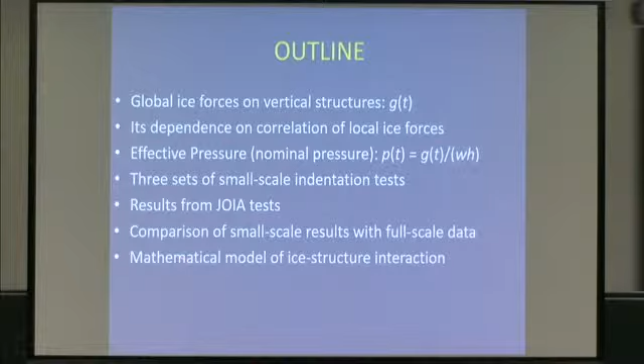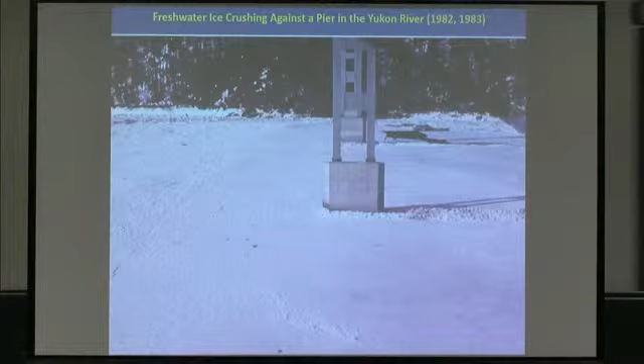My first exposure to ice structure interaction was looking at the ice moving at the Yukon River. This is the bridge pier. There are 6 of them to support the Alyeska pipeline, and on top of the bridge there is this road. Main purpose of this bridge is to support the Alyeska pipeline.

And I was told by the architect, by the engineers who designed these bridge piers, that they designed it for a pressure of 400 psi. That was the thing going in the 1980s.

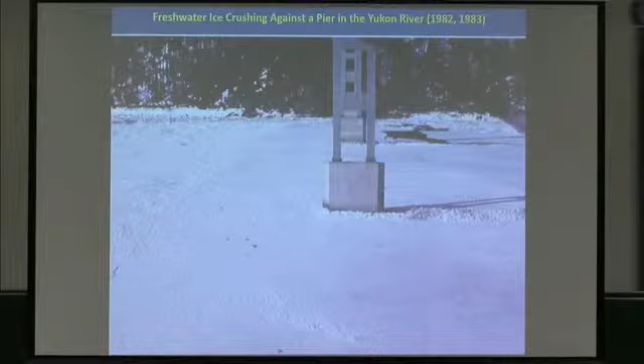Some more views. The ice here is freshwater ice, 1 meter in thickness, and these bridge piers are 30 feet long and 9 feet wide. That means 3 meters in width and about 10 meters this way.

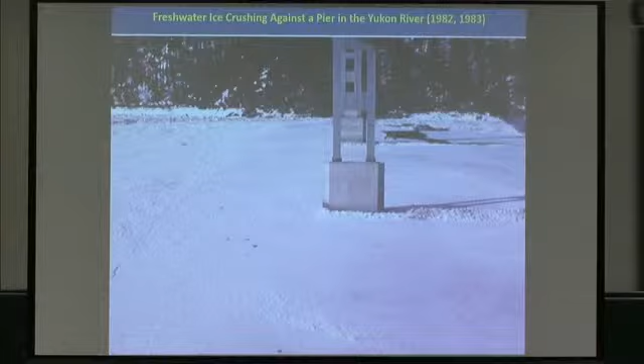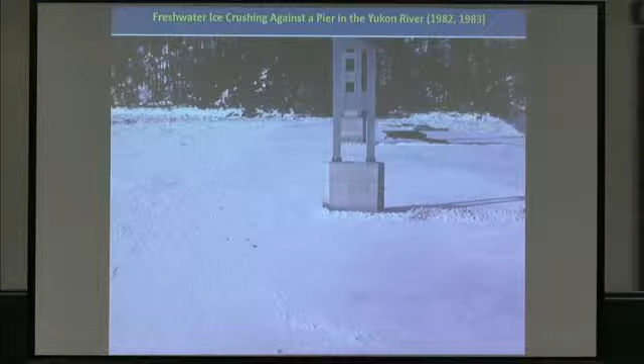The ice moves at a speed of 2 meters per second. I just happened to clock that, how much time it takes for the ice to travel from here to here, and then I estimated that the speed is about 2 meters per second.

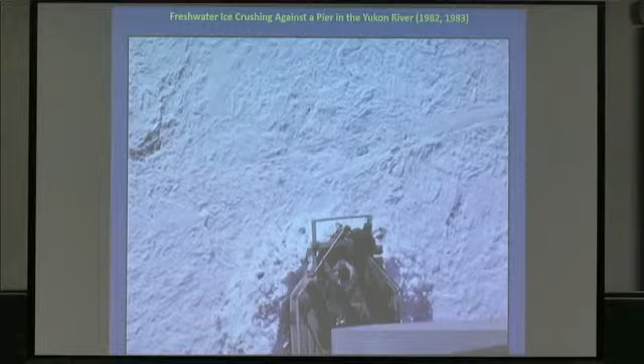So different views looking from the top. The previous picture that I took was from the high spot looking at other bridge piers, and then looking down, then looking sideways, and then looking back.

What interested me most was how an intact ice sheet could just turn into rubble and be on both sides of the structure, and then also underwater.

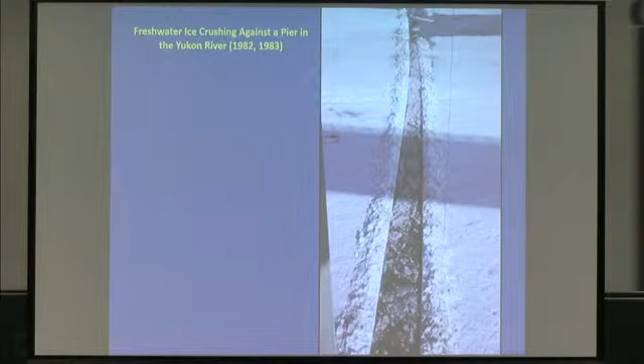I shall talk about Molikpaq data. That Molikpaq at the Amauligak location was deployed in 15 meters of water depth, and all the interaction I'm going to talk about is when there was very severe vibration in 1986.

As the ice moves against the Molikpaq, it crushes, and sometimes the weight of the crushed ice breaks the ice, and then this unbroken ice comes in contact again, and the process repeats itself.

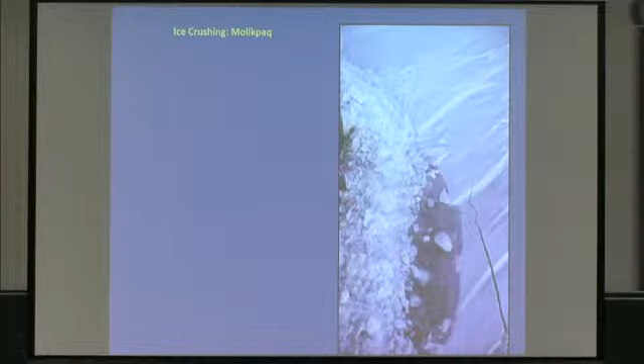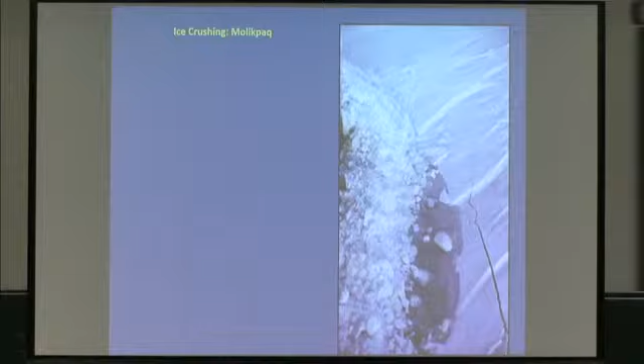I've read some reports where they talk about the ice doing stop and go, because when you observe from the top of the structure looking down, it appears that the ice is basically stop and go - that's the intermittent ice crushing. Sometimes it doesn't do that, because when it moves at a fast rate, it's just smooth or continuous crushing.

This figure was presented by Jefferies and Wright in 1988. The ice load magnitude is not displayed here, but these data were readings from strain gauges installed on three support structures, quite far apart - A, B, C - and they're random. There is no correlation between the ice forces as measured by these three records.

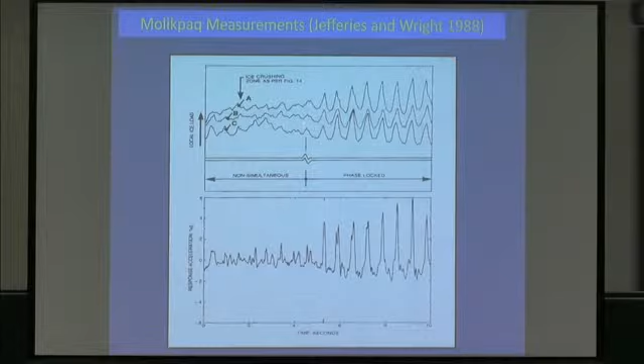Then as this ice floe slowed down, it went into the other mode, which is phase lock, they call it, or in my terminology, uncorrelated local ice forces versus correlated ice forces. This can be repeated in small scale experiments, except when I did the experiments, I began from the low end of speed, went to the high end, and observed these phenomena, then again at higher speed.

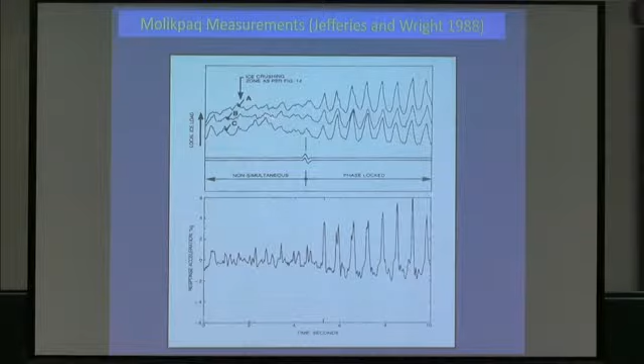Okay. I woke up in the morning today just to relieve myself, but I couldn't go back to sleep, so I started reading on my Kindle. And what I read is all depicted here.

This is Plato's Revenge - these are notes from that book, Politics in the Age of Ecology. What's the forte of the human brain? It's metaphors. What is a metaphor? It's a verbal trope or a mathematical formula. Scientific metaphors are self-consciously formal models or theories.

Model means likeness, so I'm sort of going towards physical modeling of this thing. But theory is also nothing but a story in which the data are woven together to tell a plausible story about reality. A story, if it is a very good theory, will allow very accurate prediction. So the task of science is to find the metaphors that best stand for physical reality. And eventually, as Einstein said, it is theory which decides what we can observe.

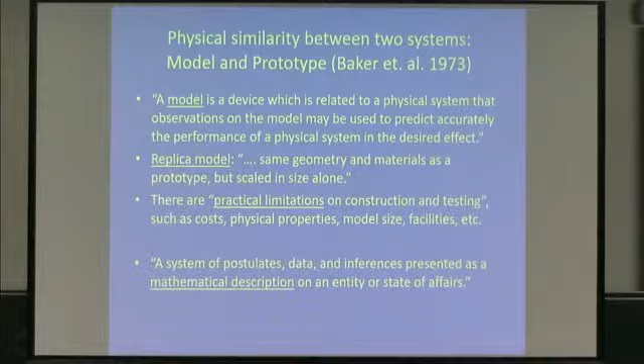And a system of postulates, data, or inferences presented as a mathematical description of an entity or a state of affairs - that's mathematical modeling.

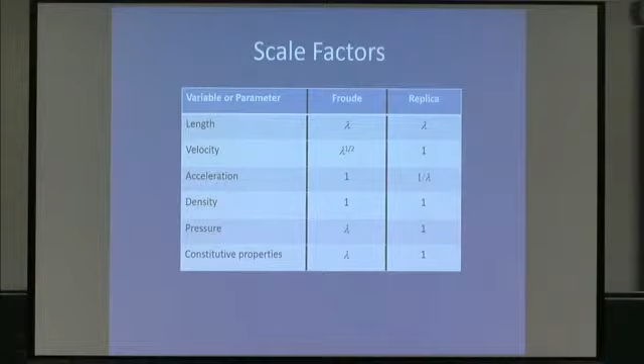In ice mechanics there are two types. Practically everyone follows Froude scaling because the gravitational forces are important. So for the length scale, you make a smaller size model of the prototype, using the same density - water and ice - and same acceleration, since unless you do it in a centrifuge, we are doing experiments in the same gravitational field as Earth. Then velocity relates by this scale factor, and the pressure and constitutive properties have to be scaled down to conduct the test so that all forces are in equal proportion.

However, in replica modeling, you scale down and use the same material as the prototype, but since gravity is no longer important, we don't use those scaling factors - instead you use the same material. So when you use all the same material, the scale factor is simply 1, and the velocity turns out to be 1 also.

That's the benefit of replica modeling - the pressure you measure in scale experiments or model tests can be directly related to the full scale situation, and you don't have to reduce the constitutive property of the model material. Since I did all my experiments with freshwater ice, I basically use this replica modeling.

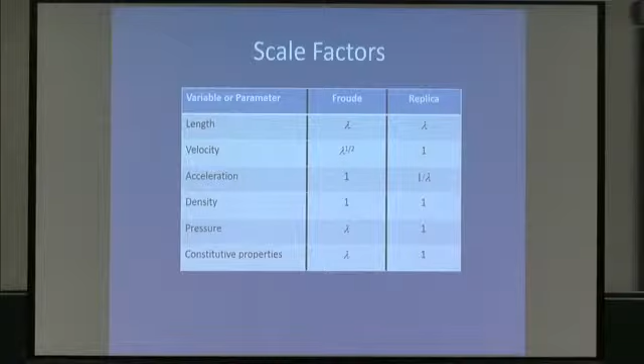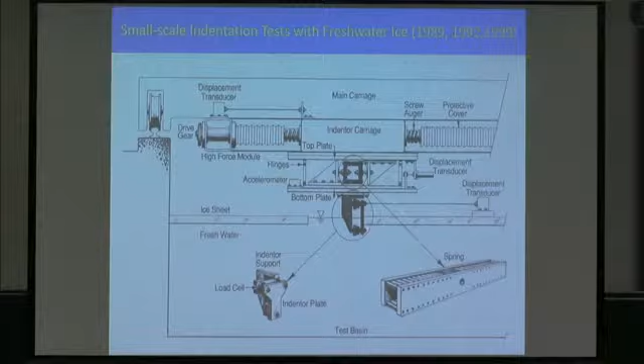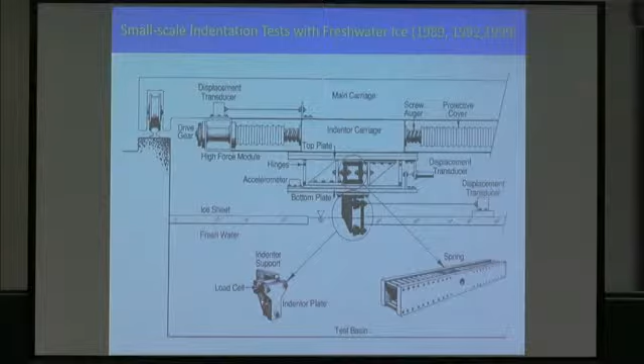So in my first series of tests, this picture shows the experimental setup. I have two plates attached to each other by hinges and bars, and they can rotate with respect to each other. Through these brackets I attach the spring, and underneath the lower plate I attach this indenter plate. So I'm measuring the forces as they develop right at the ice-structure interface, and I can change the stiffness of the whole structure by removing some of those bars in the middle.

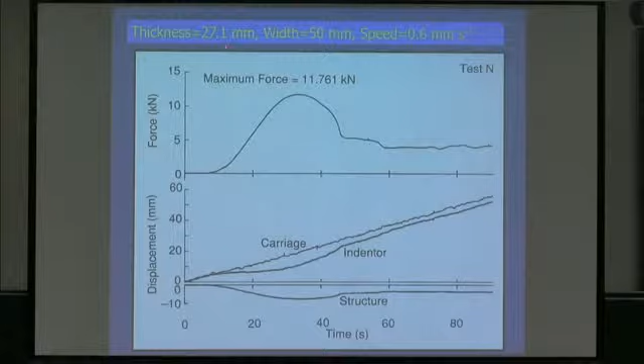At very low speed, 0.6 millimeter per second, the forces rise up, come down, and then stay constant. There is a zone of microcracked ice in front of the indenter during this period, and this is when the microcrack zone develops, and eventually it just follows the thing. The carriage is going at a constant speed, but the indenter lags behind because of the force development, and the structure displacement is given here. So it's all ductile deformation.

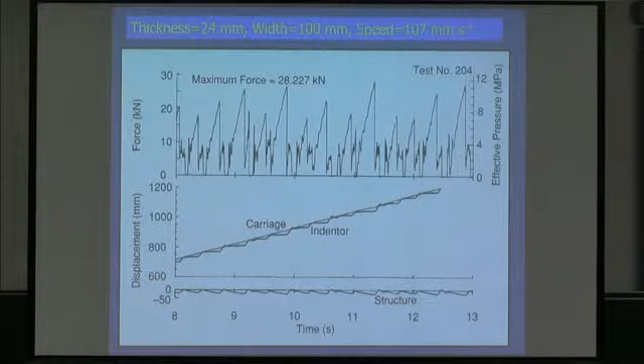But at an increased speed of 107 millimeter per second, there is this intermittent crushing, and I use that term because it happened intermittently, not continuously. Later on, at even higher speed, I experienced continuous crushing. But it should really be called ductile brittle crushing, because during this time...

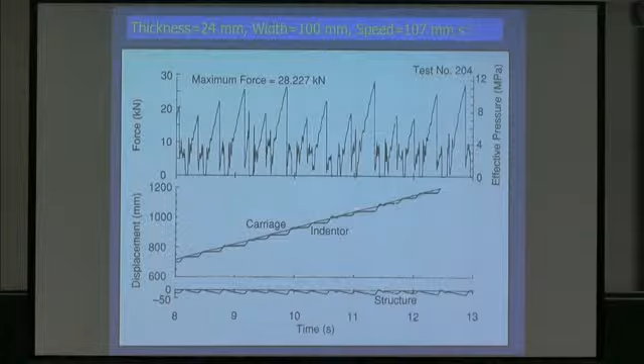This is the plot of the carriage, and whenever the force develops, the indenter lags behind a little bit, and the slope of this line is different from the slope of the carriage. That means the rate of indentation is slower than the rate at which the carriage is moving because of the structural compliance.

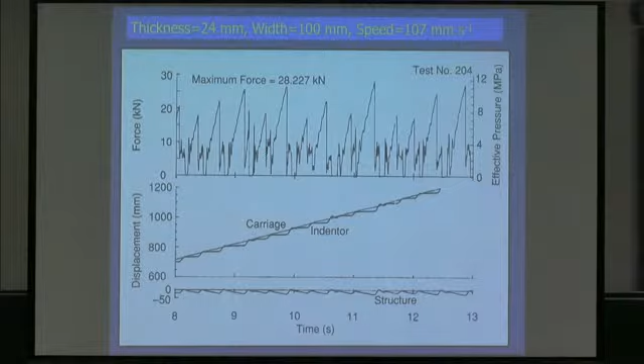Let's look at it in detail, starting from here. The force carriage and the indenter are together, but as they touch each other, the indenter lags behind and the force develops, structure displaces, and then suddenly there is a finite amount of force that the ice can sustain. So fracture occurs, and we have this sudden decrease in the force level, and after that the structure moves forward at a very high speed, and we have this interaction, which I call intermittent crushing. For a time, once the structure reaches this portion, it backs up because of the vibration, there is zero contact, and finally the next cycle begins.

Now this is the slide where I show one time that I got structural vibration at its natural frequency. Carriage moves over here, indenter displacement is indicated by this curve. You can notice that whenever the indenter slows down, there is a rise in the force, and this is totally in concert at all times.

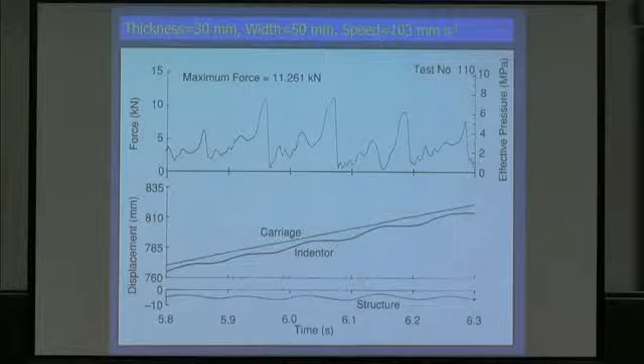I relate this incident to the swinging of a child being pushed by the parent. As soon as the child is about to go back, you get a push. So this is the push that you get every time, and if you can admit, this morning I talked with Andre, about whether the pushing of the child is a forced vibration. He agreed, but when I said that then he should agree also that this kind of situation is also a forced vibration situation. Anyway, we can talk more about that later.

In one experiment, I was incrementing the speed of interaction of the carriage, and one time, suddenly the interaction changed from this intermittent to continuous crushing.

Why this should happen was asked by Professor Morel in 1989 when I made this first presentation, that these low force values are otherwise very puzzling. He gave some explanation that there may be some melting taking place and things like that, but if you can go back, so from this force level you get this force level.

I have given the forces as measured in kilonewton, but in effective pressure terms, this is like 2 megapascal, and here it is more than about 10 megapascal. So there's a tremendous difference. Why this happens at that time I could not explain, but now I hope to explain all these things to you.

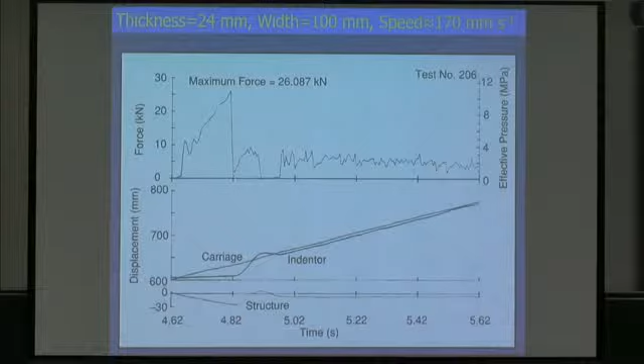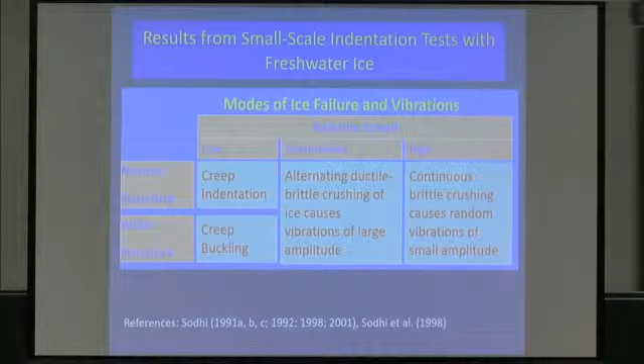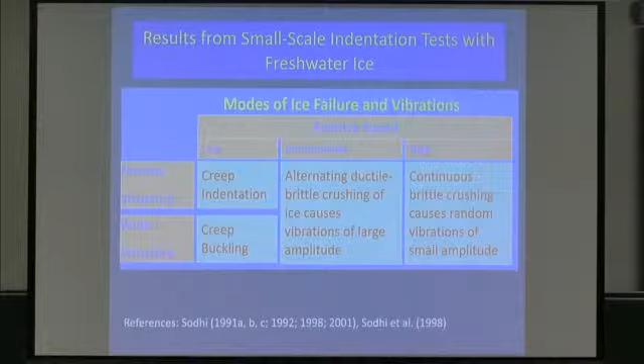At the end of the test series, I made a failure map: if the relative speed between the ice and the structure is low, there will be creep indentation for narrow structures and creep buckling for wide structures, because creep buckling is also a competing mechanism. At very high speed, you'll have continuous brittle crushing taking place with very small amplitude of vibration. However, in the middle, there is alternating ductile brittle crushing of ice, causing vibrations of large amplitude, and this sometimes gets the compliant structure into trouble because of this type of ice failure.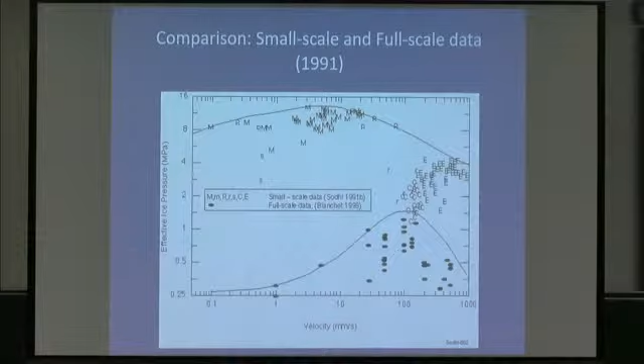So what I did, I plotted all the data that I had from my tests with respect to the indentation speed - that means the actual indentation rate the indenter is indenting into the ice versus effective pressure. I published this figure, and Blanchet in 1998 put his own data points from the measurements he had made, and I was somewhat happy to see that this C, meaning continuous crushing, is close to the full scale data. I never expected that to happen, but I was really encouraged to work more on this topic.

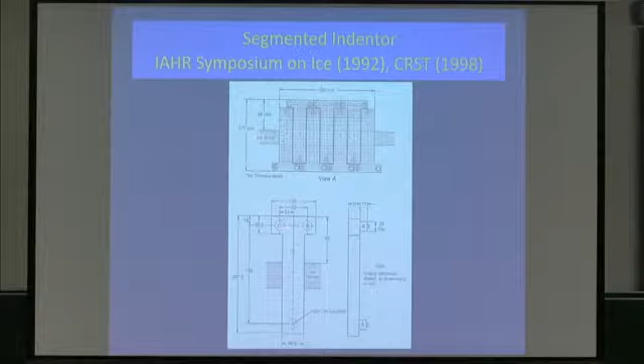Then my second set of experiments is with a segmented indenter, and I have 5 of them here. It's the same setup as before, except that each segment is in the form of a T, and it is supported - each segment is supported by 3 load cells.

So when it interacts with the ice, the local ice forces are measured, say in this segment, completely independent of the one of all the other segments.

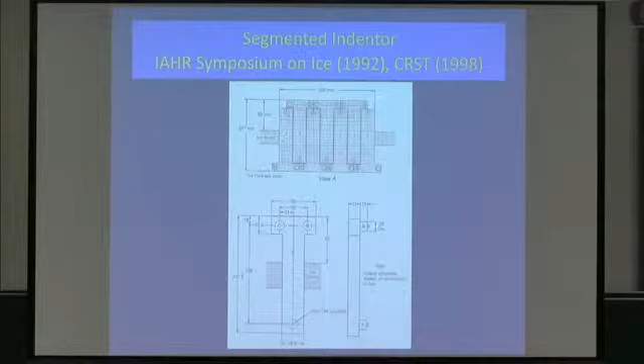Before I go on to discussing the results of this particular set of experiments, let me talk about correlation functions. There are two correlation functions published in the ice mechanics literature. One is by Kry in 1978 and Ashby et al in 1986, and by Dunwoody in 1991.

Both these functions give you eventually the same main conclusion. The delta or L discussed here is a correlation length parameter, meaning within this length everything is correlated, and outside this there is no correlation. But you can also express that as a negative exponential decay on this side and this side, where there will be some correlation here. Anyway, this is an alternate way of doing that.

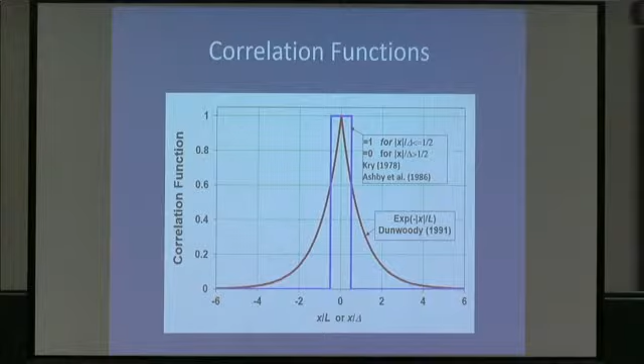I will discuss the one over here right now. Let's say this is the width of the structure, W, which is divided into n segments. N can be arbitrary. This has something to do with the asperities created as a result of ice structure interaction, and it is believed to be somewhat related to speed of interaction.

So the global force is equal to the sum of all the local forces, meaning all the forces measured in each segment, F sub I goes from 1 to n. So effective pressure P sub T is divided by the nominal area, and you can write this down in terms of n delta, which is simply width. So this is the effective pressure in each segment.

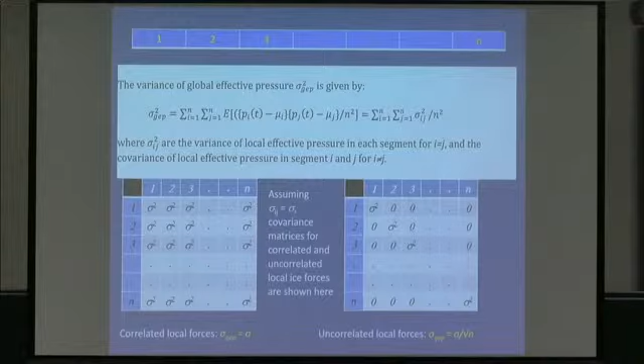However, if you put n equal to 1, meaning there is a correlation across the whole width of the structure, then you get this result. So if you have fewer stocks in your mutual fund, there will be high variability. It's as simple as that. So let's look at what the data is telling us.

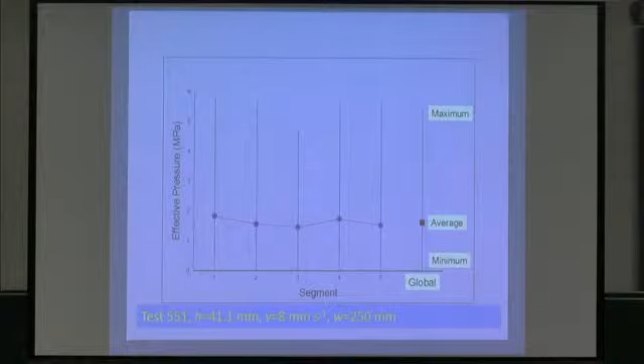So now this is the data. I'm plotting here the minimum, maximum, and average in each segment and the global load. Notice that even though there is a perfect correlation of data, the global average is the same as the local average.

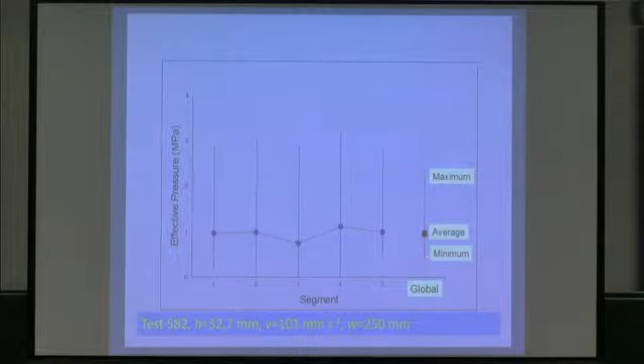At the intermediate speed, the variations are still very large compared to the global variation, but the average is the same. And then at very high speed, the average is the same, but these variations are much bigger than the one for the global force.

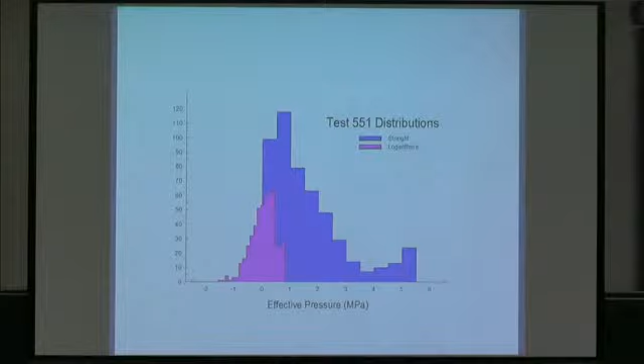This is the distribution for the low speed data. There are two sets here. The pink one is logarithm of the pressure, but just look at the blue shaded area, and this is the distribution as recorded from the test.

This is the distribution, with a little tail over here, but more or less not much different from the previous slide. And then in the high speed data, it's almost normally distributed around the mean.

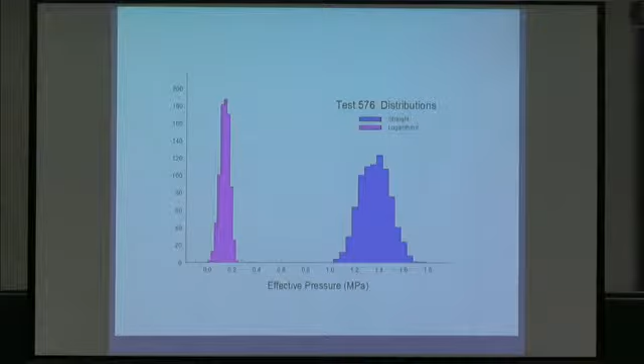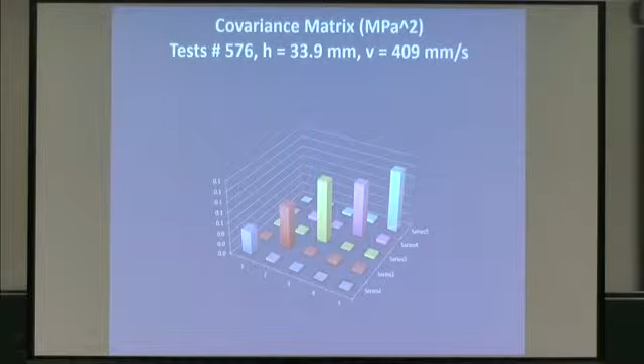So just to check on the main point: indentation speed affects the correlation of local ice forces. The average of global effective pressure is approximately the same as those in the 5 segments during both low speed and high speed tests.

During a low speed test, the minimum and maximum of global effective pressure is approximately the same as those in the segments. During a high speed test, the difference between minimum and maximum of the global effective pressure is less than those in each of the 5 segments. Histogram of the global effective pressure for high speed test indicates a normal distribution about an average value.

Correlation of local ice forces is expressed in terms of a length parameter, either delta or L, which decreases with increase in ice speed.

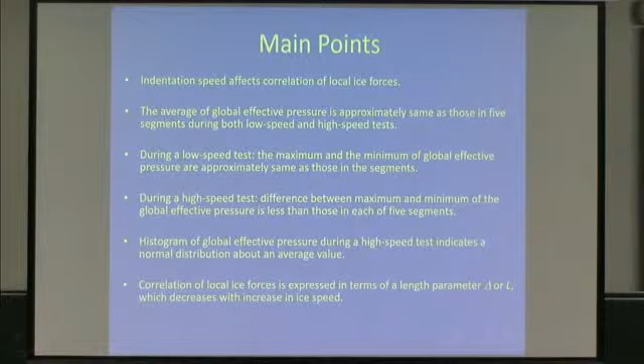If you want to get a maximum estimation of maximum global effective pressure, this can only be done for the case of high speed indentation tests, because it has a normal distribution, and then we can say the maximum value of global effective pressure equals the average plus 3 times the standard deviation.

If we take the average outside this term and look at it here, as the structure gets wider, if the number of asperities per unit thickness length increases, then this factor goes down. So for a very wide structure, I propose that the average value of the global effective pressure is a fundamental property of this process.

If you measure this over a very limited area, that's the local ice pressure, and it can be equated to the whole wide structure. However, the variation of a locally measured force will be higher than for the wide structure.

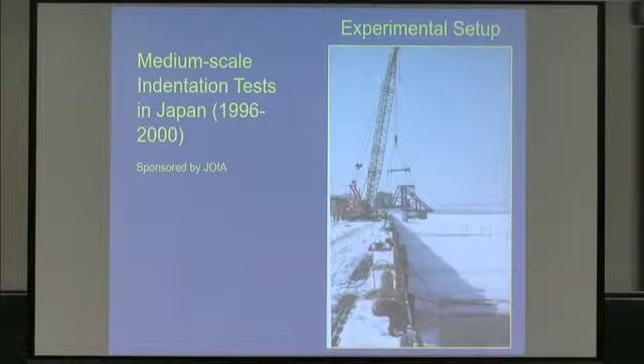So this is the experimental setup. They need a crane to set it up, a very expensive set of equipment, and they lower it. They make the ice fresh every time they need an experiment, so they clear out the ice and grow it, then cut it out and put the structure down.

So the structure is still above water, but it is segmented. Each segment is 10 centimeters wide, and there are 15 of them, making the whole width of the structure 1.5 meters. Thickness of the ice sheet in these cases is 10 to 15 centimeters.

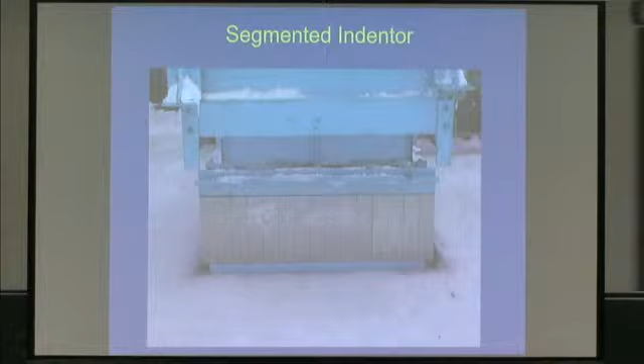Then on top of this we attached this tactile sensor. This is useful if you have something at the back to measure the total force, because in order to calibrate the readings from the tactile sensor, you need the total force from it and equate it at that particular time with the measured forces from the load cells, and then you can say that's the total load.

So this is a plot of the pressure along a line-like failure, at 30 millimeters per second speed.

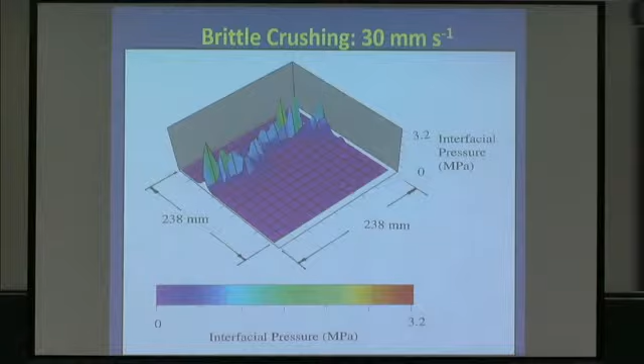After this test, we conducted another test at 0.3 millimeters per second, 2 orders of difference in speed. The ice sheet had already pointed contact, like line-like contact, but it decided it didn't want to fracture anymore, so it started to spread across the thickness.

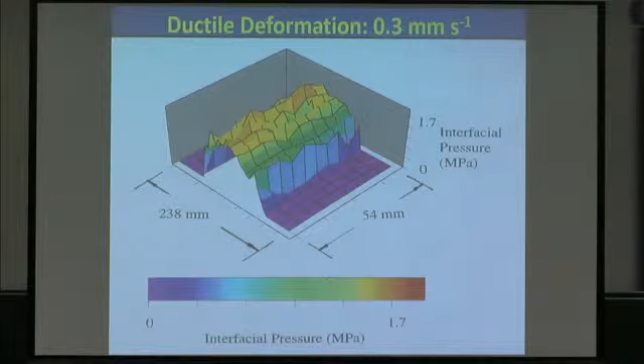So this is the line-like contact. After the test, somehow this thing is behaving in a different way than I expected.

So this is the video from the time when the contact was expanding vertically up. There it's moving.

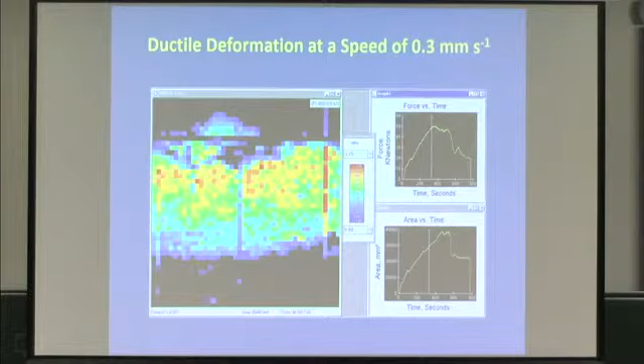Okay, let me get back to this thing again. The pressure is not constant at any time. These asperities develop at different places, but along a line basically. And something just falls off and then goes away, that's going down.

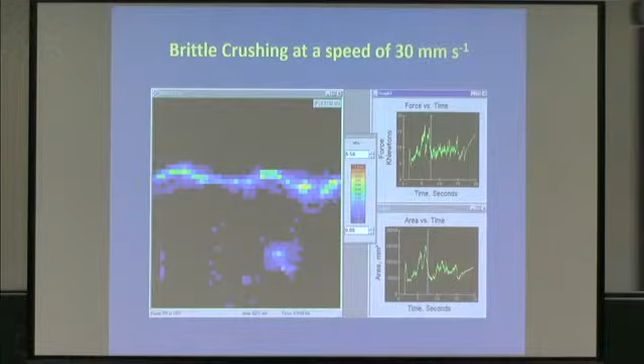Let me proceed, so this I have already shown you. Then when I came back from Japan in '99, I had another set of experiments on a shoestring budget, partly supported by my lab, partly by ExxonMobil. In this case I had a 146 millimeter wide structure, but the tactile sensor area was 84 millimeter wide, and this is the ice sheet here.

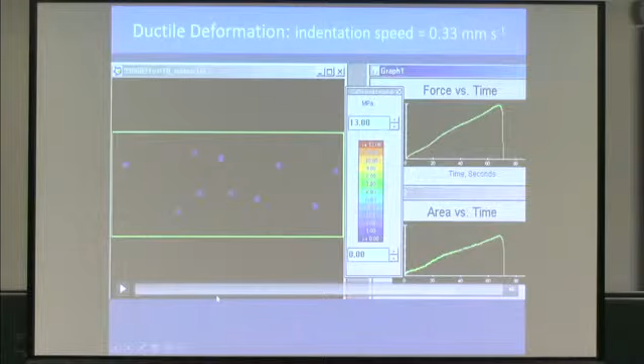This is a low speed test, and as the contact area is increasing, this is all ductile deformation of ice, creeping basically. The thing to note is that even though the contact area is increasing, this is almost linear with respect to time, that means with respect to the displacement.

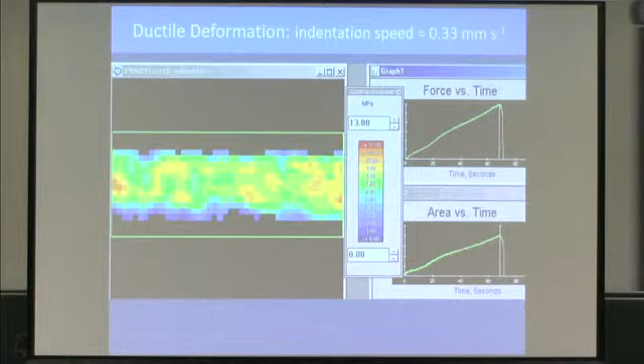And so what we have is the contact area shifting from place to place. Okay, then the intermediate case, 54 millimeters per second. The actual indentation rate varies over two orders of magnitude.

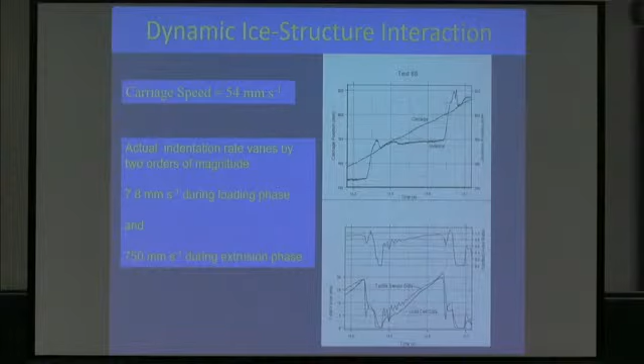What I mean is that during the time the loading takes place, described over here, it is 7.8 millimeters per second. But during this time, when the fracture takes place, the structure moves back at a very high speed, about 700 millimeters per second from this curve. So there's two orders of magnitude difference, and the length of time it takes is very small compared to the loading time, but the amount of displaced indentation is small, whereas the length of indentation is very large over here. Let's see.

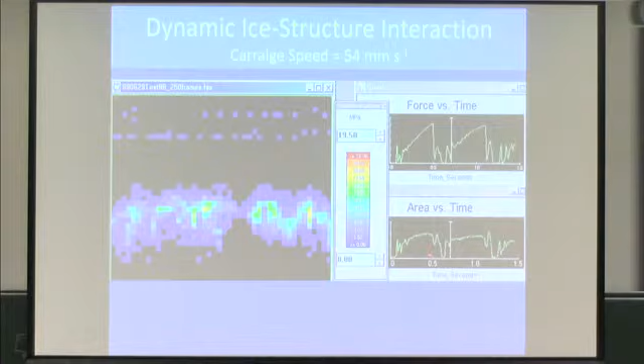So the structure is not in contact with the ice, and now contact is made, and these asperities are the remnants of the previous cycle, and they stay there and expand in area. I will call these correlated ice forces, local ice forces, and then they move very fast - these are uncorrelated ice forces. So there is another cycle coming up, no contact, and then they come up, and these are the remnants when the ice moves forward, and then these grow in area. But notice this is linear with respect to time, and I will speak about that a little bit later.

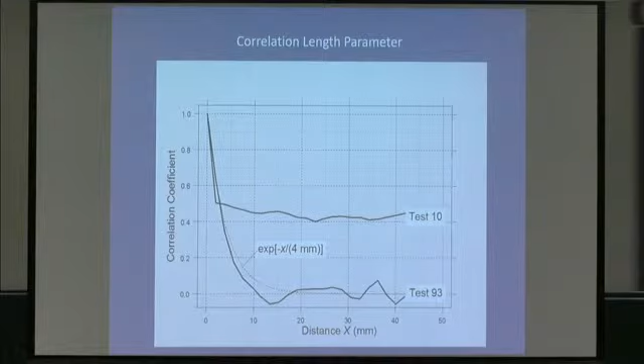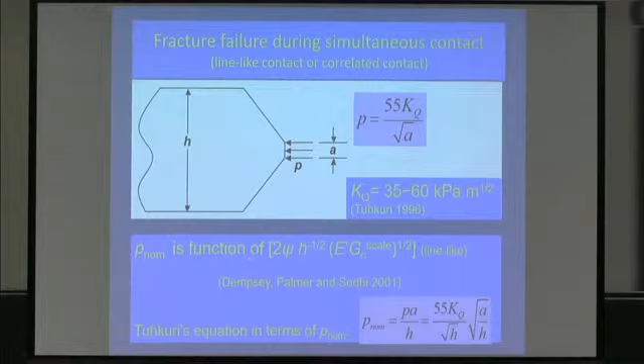And in 2001, when I was here in Cambridge, we also published a paper, and it showed that the relationship of P nominal with respect to the ice thickness should be H to the power minus half.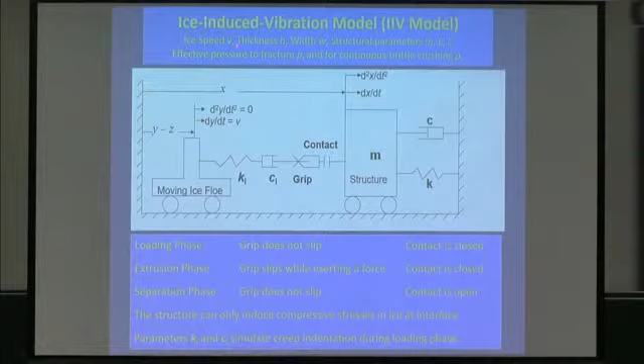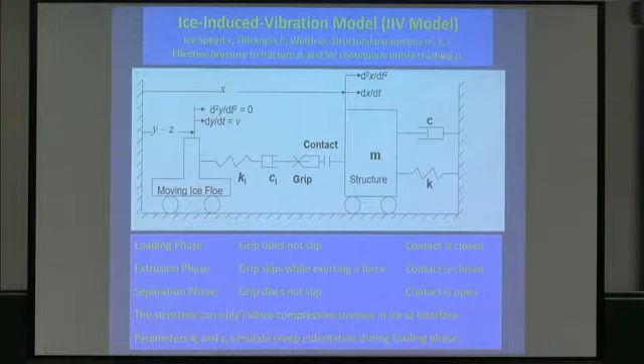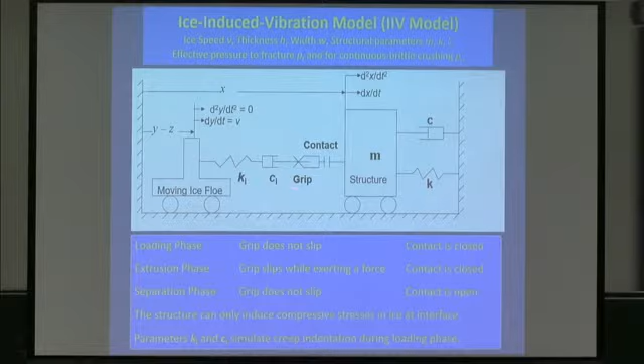I did a mathematical model, ice speed. In this model you need to specify ice speed, thickness, width of the structure, structural parameters m, k and c, which is the damping coefficient. The only three things you require about the ice is the effective pressure to fail in fracture—that is when you have intermittent crushing—and the effective pressure when you have continuous brittle crushing. These models have been described; I've published this, just improved the model a little bit, and included the elastic and viscoelastic part, which I'm going to go into.

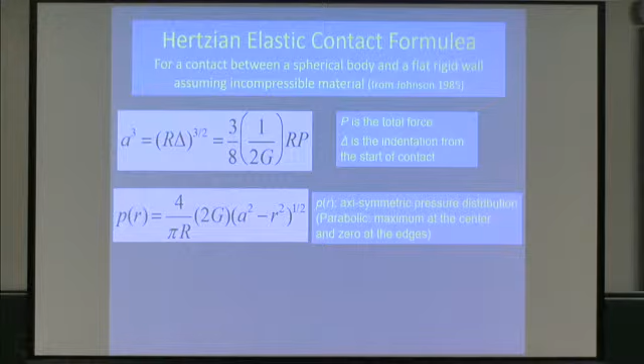I assume that each asperity is in the form of a sphere, and I have the elastic formula for this kind of indentation, courtesy of Hertz, and I convert those formulas. I didn't do this conversion myself, but it is possible to convert these formulas into viscoelastic formula. These are taken from Johnson's book, Hertzian contact formula. What we do is assume that ice behaves viscoelastically, so here's the elastic part, the viscoelastic part, and there's a relaxation time tau.

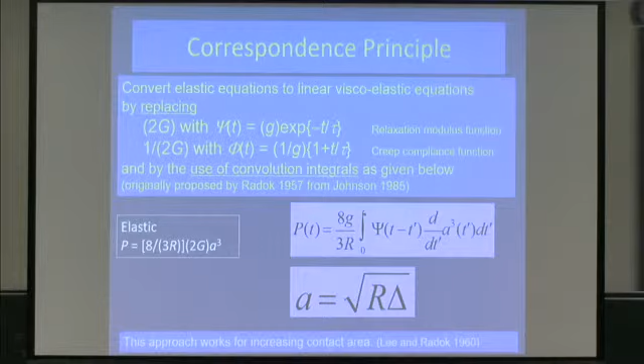It's a very simple model, but I wanted to see what happens in the simple model. The relaxation modulus function is given here, and the compliance function is given over here. So what you do is take the 2G, replace it with this relaxation modulus function, and then do a convolution integral as shown over here. When you do all this math, you come up with this integral, which is non-dimensional.

The rest of the terms can be put together here with a non-dimensional value, and this is the value of the non-dimensional integral. Instead of taking this slightly nonlinear thing, I take it as linear, and then this function can be related as a simple spring. The main thing is that this t over tau can also be taken as indentation into the ice.

One thing to notice is that this relative speed at which you indent varies at 3/2 power. Suppose the relative speed changes by 2 orders of magnitude, which I found in my test, then this factor changes by 1,000 times. In other words, when you're moving very fast, these asperities are crushed very quickly—they don't have time to survive—whereas when you're moving slowly, they have time to survive and can correlate with each other.

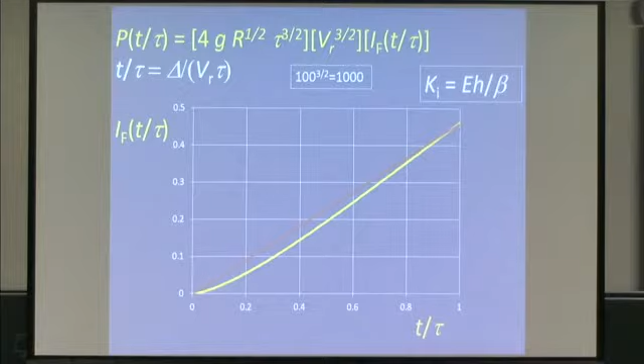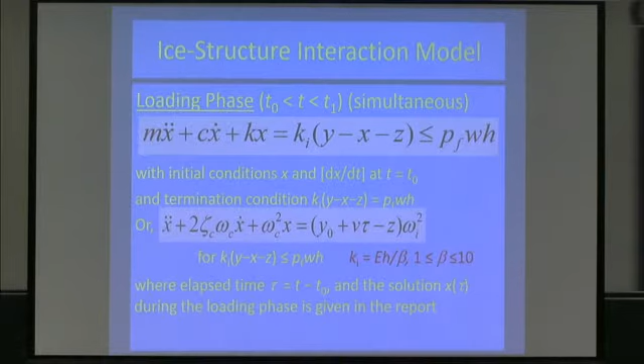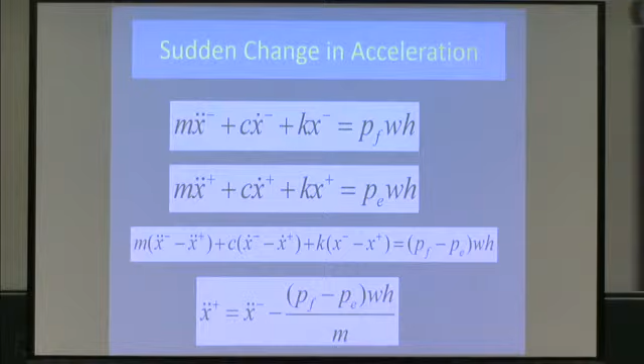Because of the compatibility of displacement and speed, these two terms are zero, so the change in acceleration is given by this formula here.

If the structure is very compliant, I choose this loading, extrusion, separation sequence. But if the structure is very rigid, not so compliant, I choose this other version. This shows the conditions for when it changes from one phase to the next. For instance, when the ice force is greater than the resisting force, you go to the next phase, and when the relative speed is zero, you go to the next one, and so on.

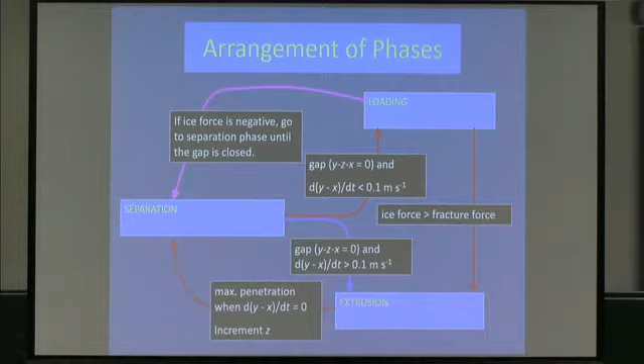So doing all these things, here's the comparison of my model's numerical results with actual test data. One thing I don't have in my model is that these peaks are not of the same value, whereas in my model they are of the same magnitude. That can be fixed by simply changing something.

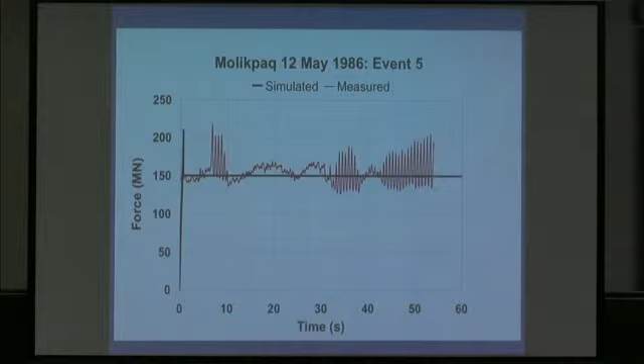Here is another set of tests at a lower compliance, and I can reproduce these results. I tried to reproduce these results from Molikpaq data. I could not, because my model simply assumes that this force is constant. But if I put some variation of this force in, then I may be able to reproduce these results.

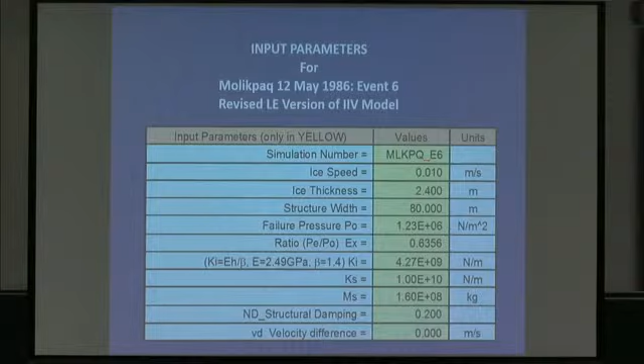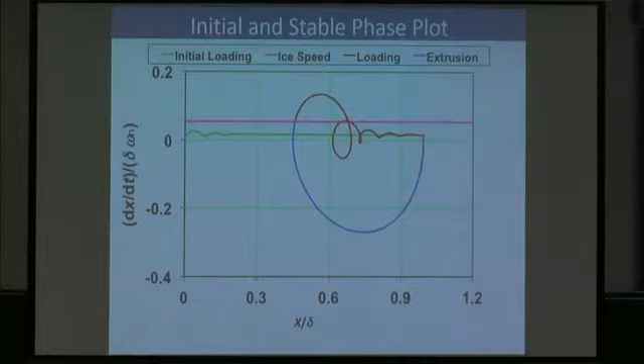This is the acceleration plot, and again it works very well here. This is the phase plot of a stable cycle—you compress the ice, and when it fails, it goes very fast. Over here you change this thing, so this is only two phases, like loading and then extrusion.

This is my attempt to understand ice crushing during ice-structure interaction, and to relate the results of small scale and medium scale tests with data from full scale measurements. It is the correlation of local ice forces at low and high speeds of indentation that gives rise to intermittent and continuous crushing of ice during ice-structure interaction. Thank you for your attention.

So Dev, how did you get the relaxation times? Were they just kind of tuned to fit, or is there a physical basis for that?

I tried to measure the relaxation time by pushing the indenter into the ice, then waiting there and recording how the ice relaxes. I was not totally successful in doing that, but it is in terms of minutes or hours maybe, I don't know. I don't have any idea. I could use some help in doing that. I have the data of those tests, but not fully analyzed.

As long as it is more than a minute—here we are talking in milliseconds or a fraction of a second of the loading—so as long as we are on a very short time scale, I think my solution of converting from Hertzian contact to viscoelastic contact is applicable for a very short period of time.

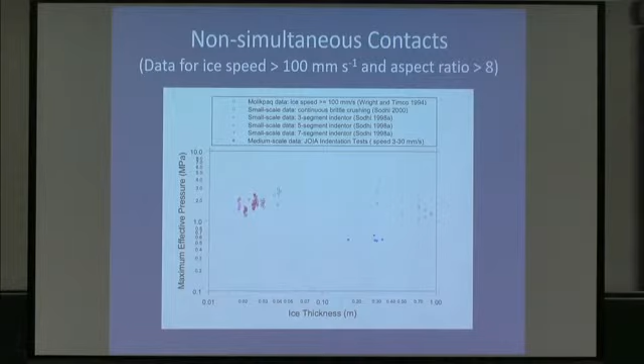Very nice presentation. I'm just wondering if you've looked at the same model in the context of the JOIA data, and how the parameters change when you have warm saline ice. JOIA data is there - the blue dots here relate to the JOIA data. It's very warm saline ice, and I only considered those tests where it was continuous crushing, so these are the values. They're much lower than those values. But did you look at applying your model to this data? No, I haven't done that yet, but I have the data. Unfortunately I just haven't done that part.

There was a test done in front of all the spectators, I think February 4, '99. I think if you want to try that, that would be the test, because the ice was brittle. There's something I forgot to mention - one of the key features that model ice should have is brittleness, and that's only possible with freshwater ice. So when it is missing, it is totally a different thing.

Thank you very much. Is it right that your model is one-dimensional and linear? One-dimensional, yes. So it's a single degree of freedom model - the distribution of pressure across the contact area, like in the Matlock model, is not important? I don't understand the question. The distribution of pressure along the contact area is not included in the model? I'm assuming that whatever is happening is uniform across the whole thickness. Yes.

Just a short question - so this contact area, I assume there's one spot of high pressure over the ice thickness. Is it because you can only have one place of stress concentration over the ice thickness, and is that based on your data? No, this spherical model is simply for convenience because I have the elastic results.